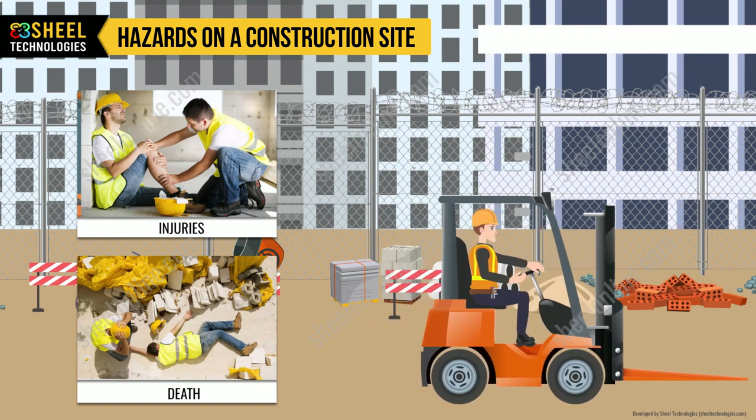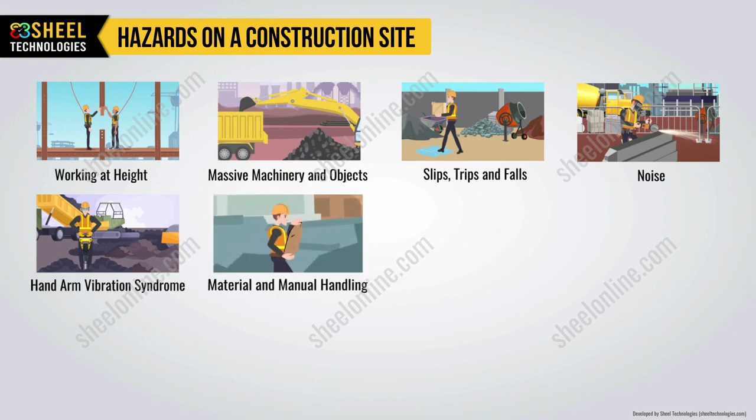Hazards on a construction site. Construction workers engage in many activities that may expose them to serious hazards. These hazards may result in injuries or even death. Every construction worker must be aware of construction site hazards, such as working at height, massive machinery and objects, slips, trips, and falls, noise, hand-arm vibration syndrome, material and manual handling, collapsing trenches, actively used chemicals, electricity, airborne fibers and materials, sharp edges, and scaffold.

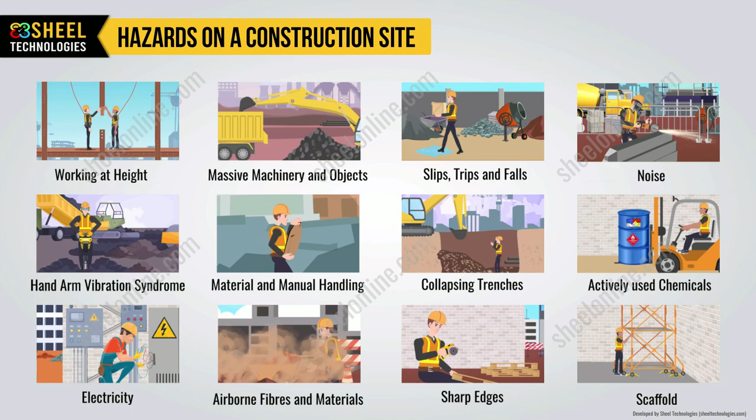Working at height. The construction of buildings and demolition works frequently requires tradesmen to work at height. Fatalities and injuries involving height-related factors account for many accidents each year. The risks associated with working at a height are often increased by added access and mobility restrictions. Training, including safety awareness training, is essential for employees required to work at height.

Massive machinery and objects. While there are a multitude of dangerous hazards at a construction site, dangers posed by massive machinery and objects are one of the most serious hazards. Construction workers must deal with dangerous heavy machinery on a daily basis, including power tools, bulldozers, cranes, forklifts, and dump trucks. Massive machinery and objects incorporated in construction can be a source of danger at construction sites.

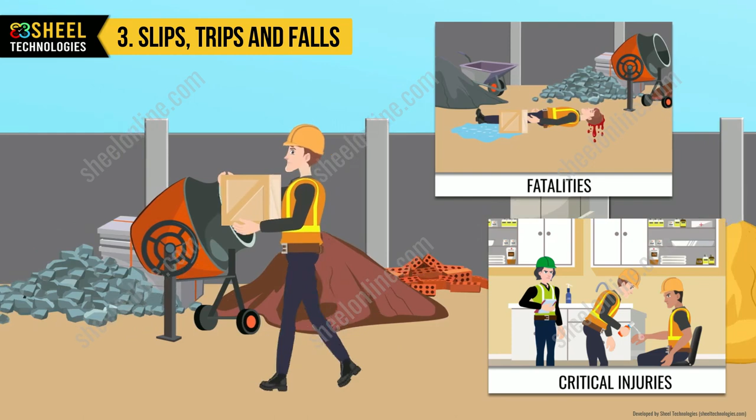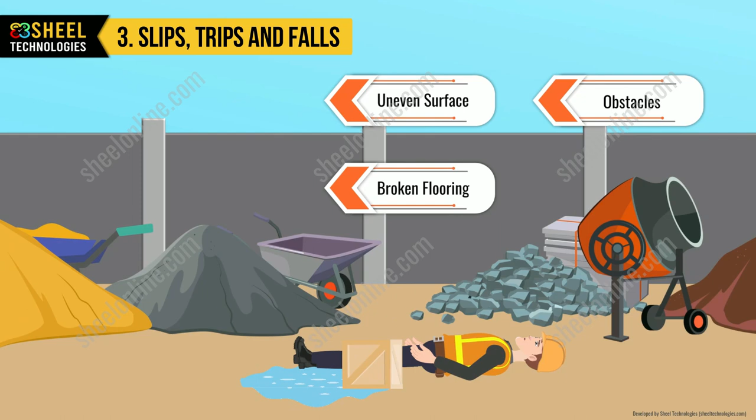Slips, trips, and falls. Falls are one of the leading causes of fatalities and critical injuries. Walking surfaces can be very hazardous if they are slippery. Uneven surface, obstacles, broken flooring, damaged steps, potholes, and other damaged surfaces can result in trips and falls.

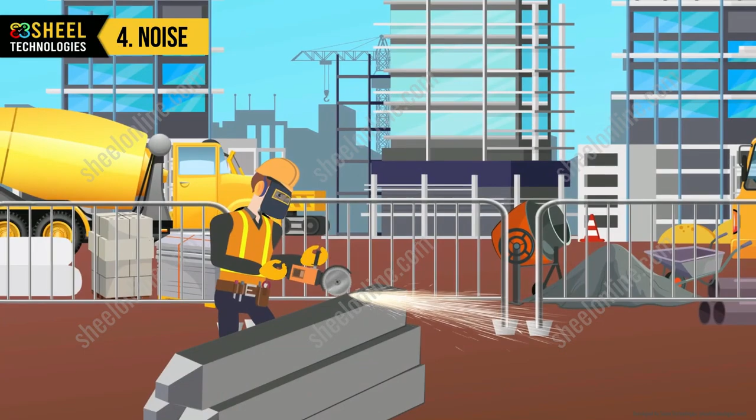Noise. The construction site working environment is busy and noisy. Sudden loud volume can be hazardous for workers, but it's also exposure to long-term, repetitive sounds, such as grinding and drilling, which can lead to short or long-term problems, including hearing loss. Construction site noise can also present a distraction, which can result in accidents.

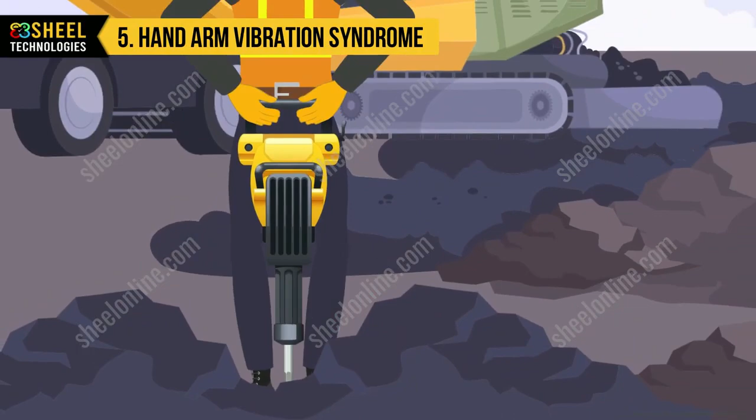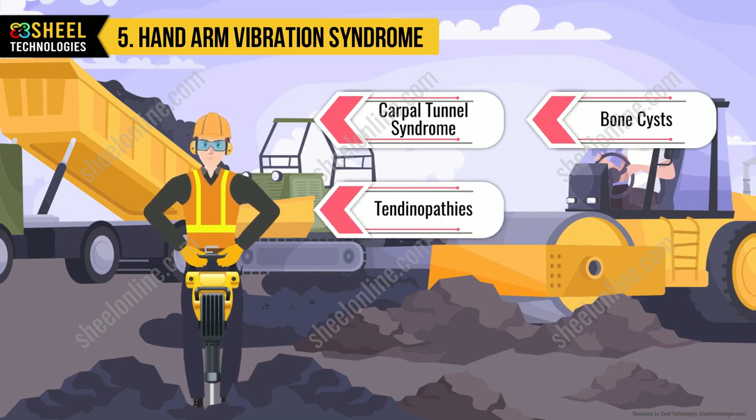Hand-arm vibration syndrome. It is caused by occupational exposure to vibrating hand tools. Conditions such as carpal tunnel syndrome, bone cysts, tendinopathies, and osteoarthritic changes of the hand, wrist, and elbows have been attributed to exposure to hand-arm vibration. It can impact workers for the rest of their lives, and damage and side effects can be permanent in severe cases.

Material and manual handling. Many construction site activities involve manual handling, a hazard which puts workers at risk of musculoskeletal disorders.

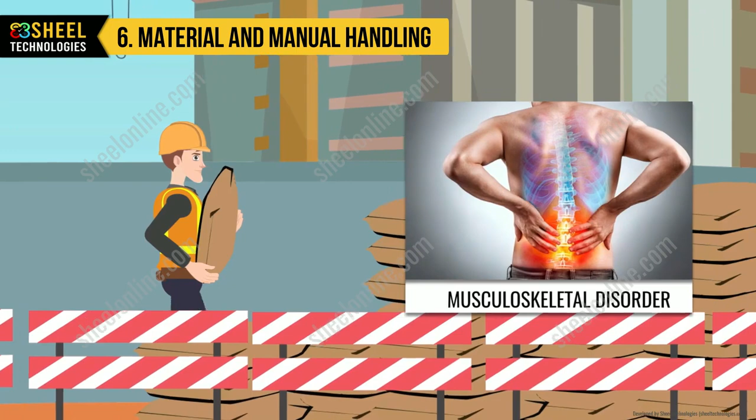Collapsing trenches. A common occurrence on construction sites is the collapsing of trenches with workers inside. Further, a building that is being demolished or under construction can suddenly and unexpectedly collapse, which can injure, or kill, those inside.

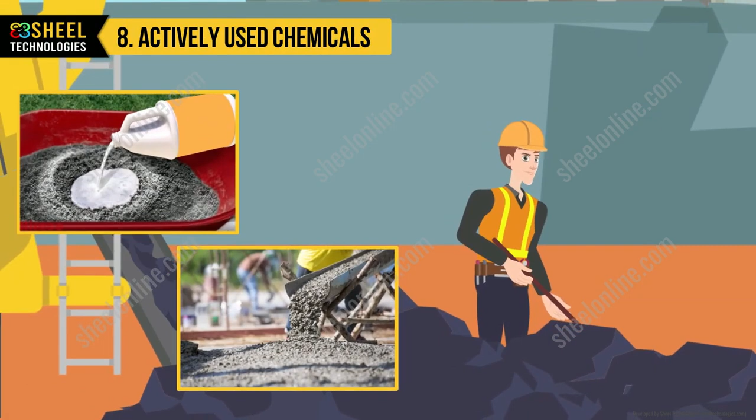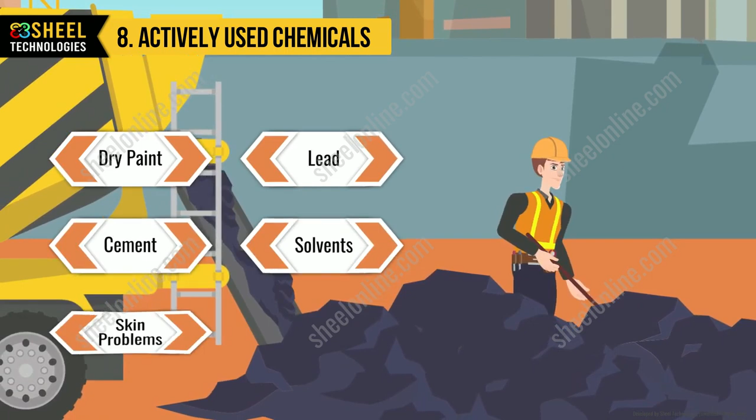Actively used chemicals. Processing equipment that uses chemicals can be sources of numerous hazards. Dry paint that contains lead, and exposure to materials, such as cement and solvents, that can cause skin problems, such as dermatitis. Many other problems can occur by using chemicals, like chemical burns.

Electricity. Electric shock and electric burns occur when a construction worker uses unsafe equipment, such as damaged electrical wires, and exposed wiring, can be dangerous. Electrocution can occur when a person comes into contact with an electric current. Extension cords can be found in almost every work environment. Damaged cords can be dangerous, as they can cause fires and serious injury.

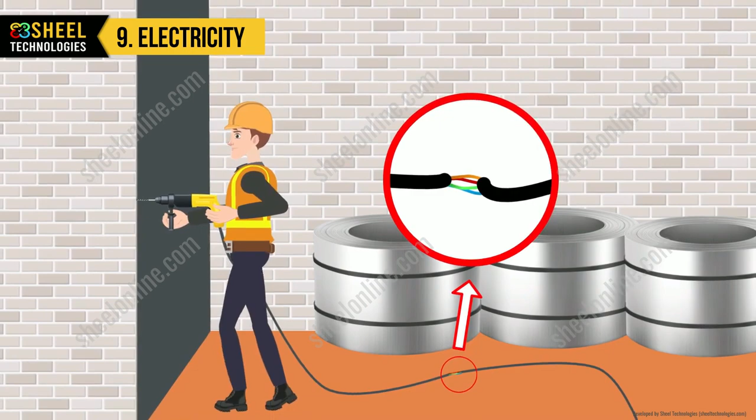Airborne fibers and materials. Unsurprisingly, a lot of dust is produced on construction sites. The dust on construction sites is often an invisible, fine, and toxic mixture of hazardous materials and fibers. This can damage the lungs and lead to diseases such as chronic obstructive pulmonary disease, asthma, and silicosis.

Sharp edges. Simply walking past machinery may be hazardous if sharp edges are not guarded. Sharp edges of machinery and tools or equipment can cause injuries, such as cuts or even amputations.

Scaffold. Scaffold is an elevated, temporary work platform. Workers working on scaffolds are exposed to many hazards, such as falls, slipping, unsafe access, the lack of fall protection, and struck by falling tools and debris. Scaffold collapse can be caused by instability or overloading.

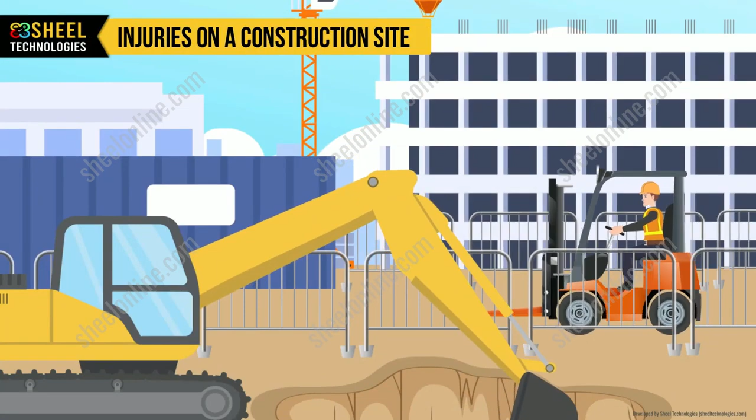Injuries on a construction site. Workers may experience cuts from materials and tools, fatal and non-fatal falls from ladders, scaffolding, and burns from welding and chemicals that are used at construction sites. Some jobs expose workers to harmful materials, fumes, or to dangerous machinery. Workers may also experience muscle fatigue and injuries related to lifting and carrying heavy materials.

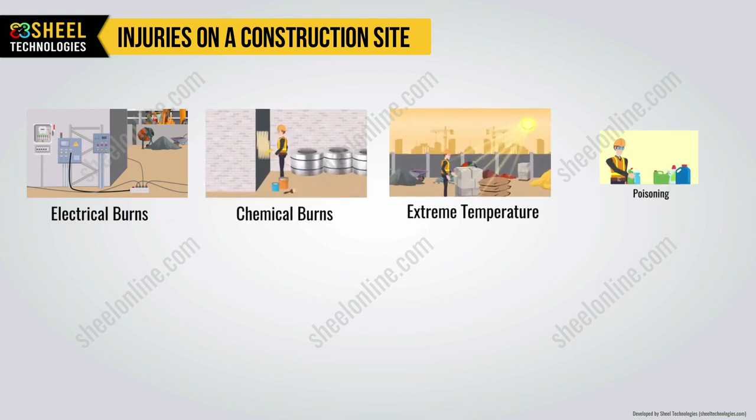While working at construction sites, a construction worker may have to face many injuries such as electrical burns, chemical burns, extreme temperature, poisoning, traumatic brain injuries, repetitive strain injuries, and crush injuries.

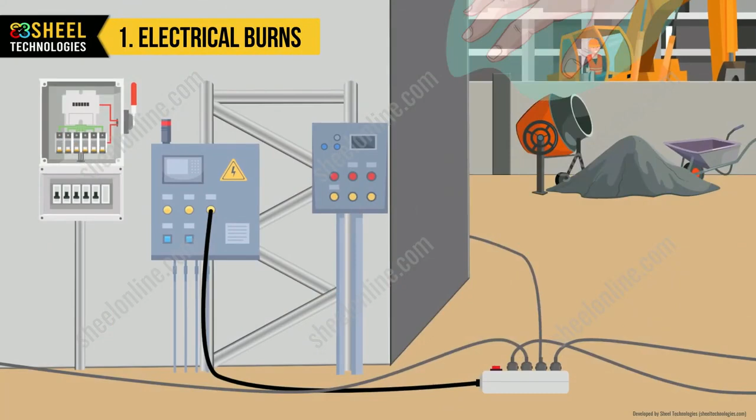Electrical burns. Although not safe, it's not uncommon to find loose wires around a construction site. An electrical burn can occur when a current jumps from an electrical outlet, electrical cord, or electrical appliance, and passes through your body. These types of burns can cause internal damage to the body, including brain injury, heart injury, or death.

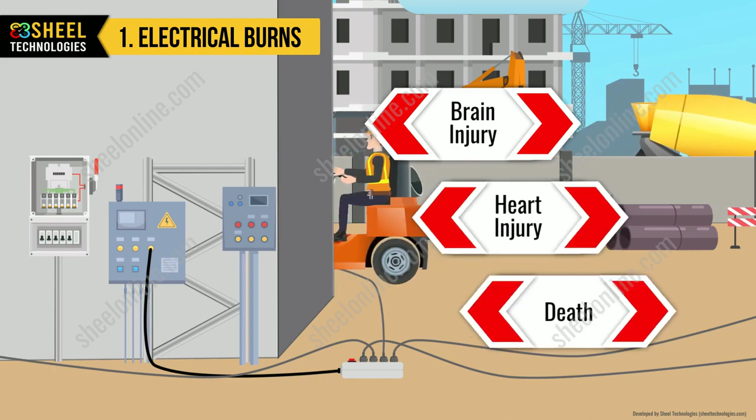Chemical burns. Chemicals are sometimes required on construction sites, like paint thinner, plumbing products, or bleach. In the case that a chemical is not appropriately sealed, stored, or out of the way of typical construction work, an injury to the body may occur, like a spill. A chemical burn occurs when the skin is in contact with a strong substance, burning through the skin until it's adequately washed away.

Extreme temperature. Work outdoors increases the possibility of suffering from heat exposure. Extreme temperature can also pose a danger to workers. Heat stress can cause heat stroke, exhaustion, cramps, and rashes.

Poisoning. Poison from hazardous chemicals can cause severe damage or death. Traumatic brain injuries caused by not wearing a safety helmet at construction site.

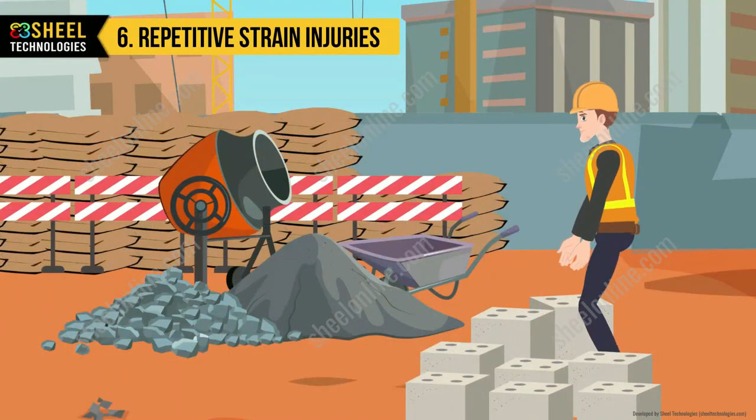Repetitive strain injuries. Lifting heavy loads or carrying heavy loads, frequent bending or frequent twisting, and heavy physical work are risk factors for low back disorders. Repetitive strain injuries are associated with repetitive tasks, forceful exertions, vibrations, mechanical compression, or sustained and awkward positions.

Crush injuries. Slips, trips, and falls are a major source of injuries and fatalities among construction workers.

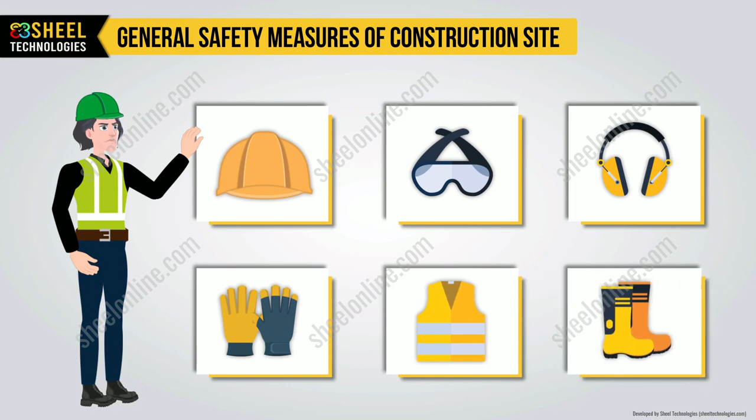General safety measures of construction site. The first rule of safety is always wear correct protective equipment. Do not drink or take drugs while working. Always pay attention to personal hygiene.

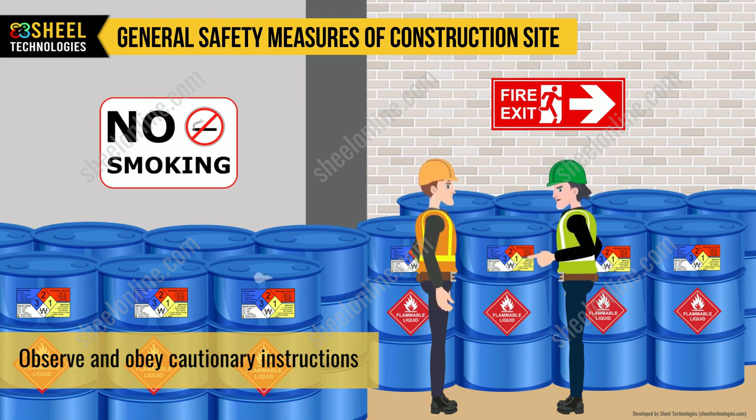Do not play in the workplace. Report to your supervisor immediately if you notice any unsafe condition. Observe and obey cautionary instructions, signs, and symbols, which are displayed in the relevant places.

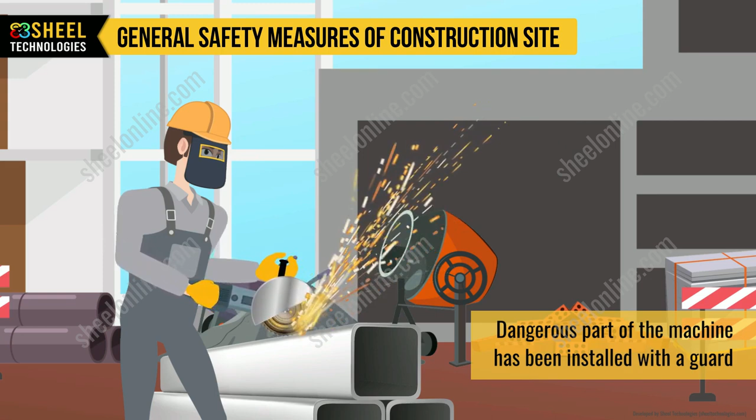Before you operate a machine, ensure that the dangerous part of the machine has been installed with a guard. Avoid going to any area with insufficient lighting, as there may be some dangerous places which have not been provided with fencing.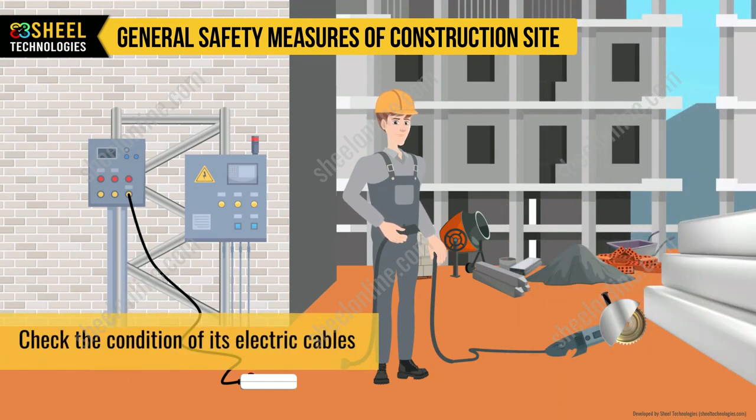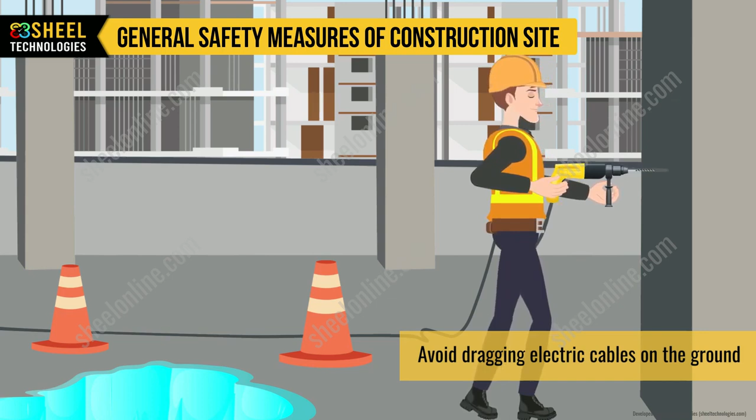Keep vigilant all the time, and watch out for moving cranes, hooks, or other lifting equipment. Before you use any electrical installation or tool, check the condition of its electric cables. Avoid dragging electric cables on the ground or allowing the cables to come into contact with water. Use electrical tools installed with an earth leakage circuit breaker, ELCB.

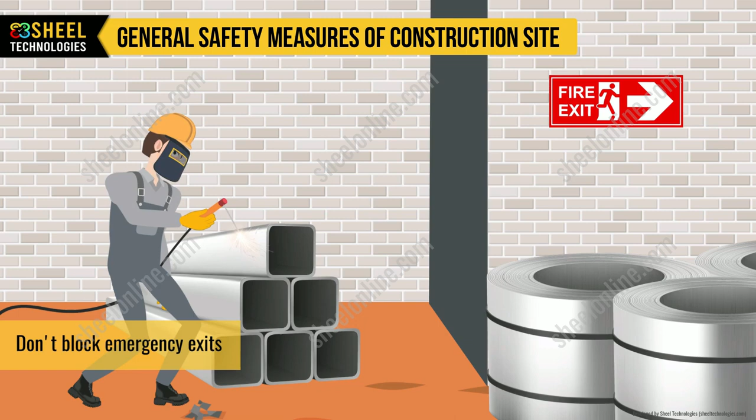Use and handle chemicals with care. Don't block emergency exits and assembly areas. Avoid shortcut methods and do the job with safe procedures.

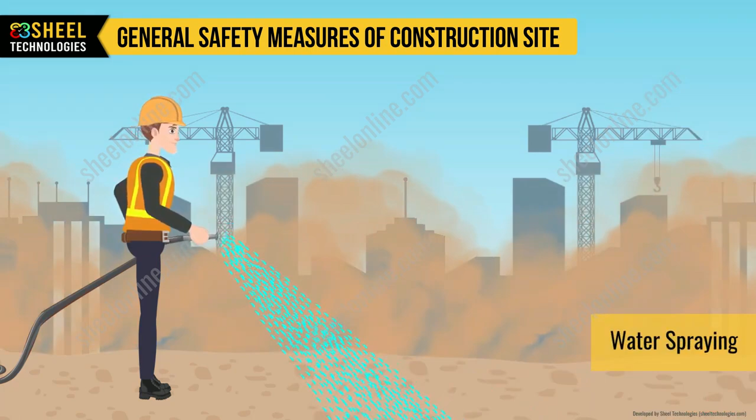People should wear dust masks and safety glasses in all dust-polluted atmospheres. Suitable measures, like water spraying, shall be done frequently to reduce the effects of dust pollution. Adequate training shall be provided among the employees in increasing the awareness on environmental protection procedures.

Construction accidents. Two construction workers die each day at construction sites, on average, and thousands more are seriously injured. But the loss doesn't stop here. Construction accident injuries cripple entire families' abilities to earn income, care for their dependents, and sustain their quality of life.

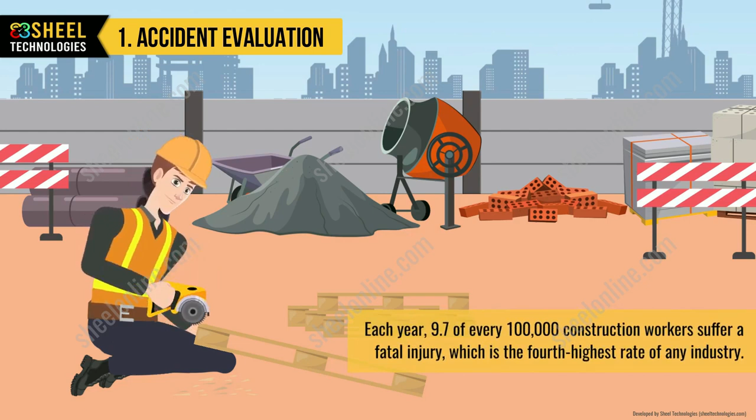Accident evaluation. Each year, 9.7 of every 100,000 construction workers suffer a fatal injury, which is the 4th highest rate of any industry. Workers between 25 to 34 years old are the most likely to be injured in a construction site accident. Most construction site injuries involve construction workers' back and spine.

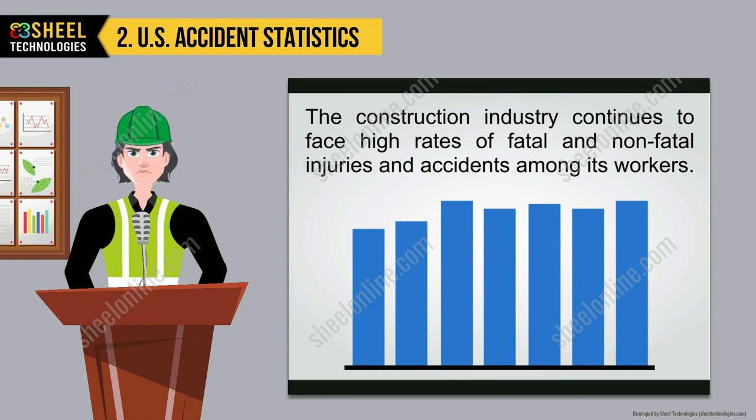U.S. accident statistics. The construction industry continues to face high rates of fatal and non-fatal injuries and accidents among its workers. Fatal construction industry statistics: 1 in 5 deaths among U.S. workers is in the construction industry.

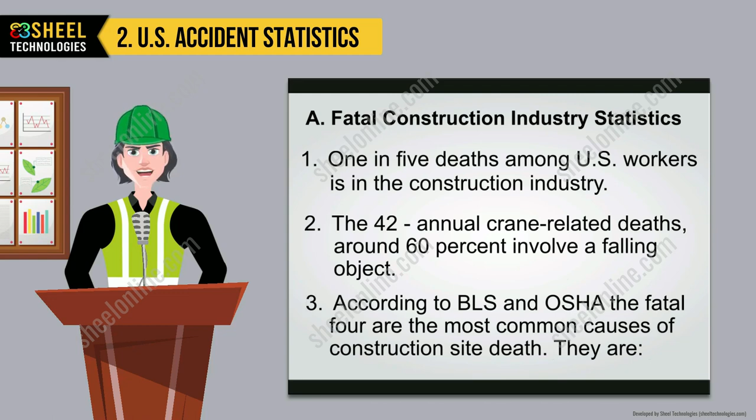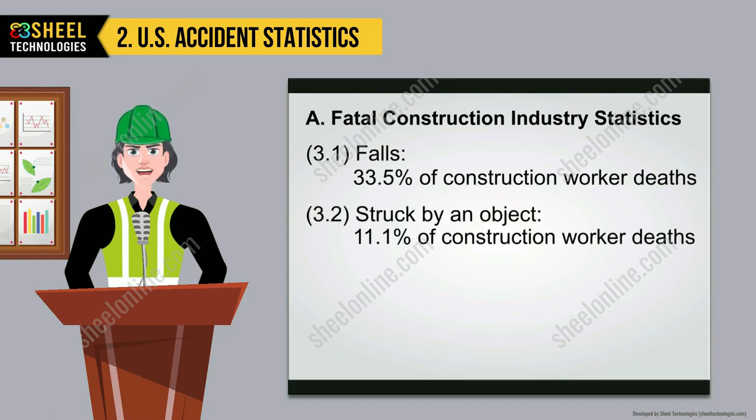The 42 annual crane-related deaths, around 60%, involve a falling object. According to BLS and OSHA, the fatal four are the most common causes of construction site death. They are: falls, 33.5% of construction worker deaths; struck by an object, 11.1% of construction worker deaths; electrocutions, 8.5% of construction worker deaths; caught in between, 5.5% of construction worker deaths.

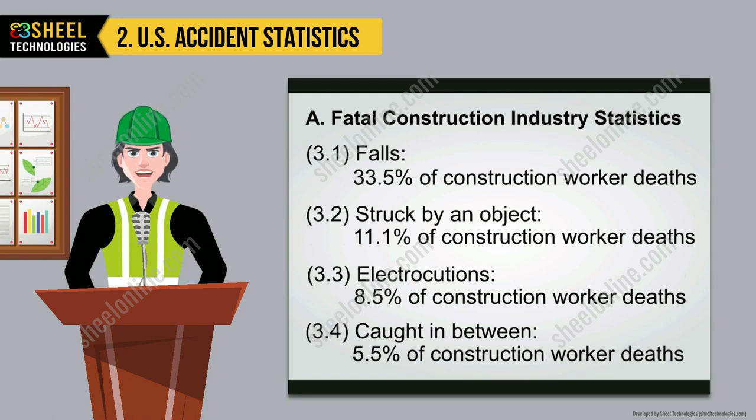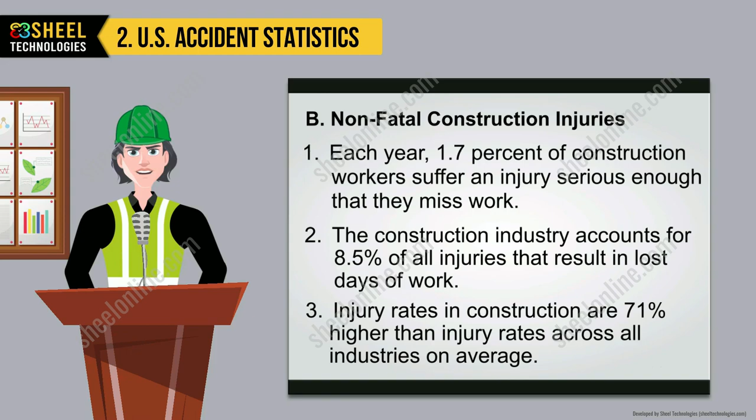Non-fatal construction injuries. Each year, 1.7% of construction workers suffer an injury serious enough that they miss work. The construction industry accounts for 8.5% of all injuries that result in lost days of work. Injury rates in construction are 71% higher than injury rates across all industries on average.

What to do when an accident happens? Get medical attention. Document or report the injury to your employer or construction site manager. Gather contact info for witnesses. Seek an attorney to evaluate potential claim.

Preserve evidence. Take photos of the injury, location where the accident occurred, and if possible, retain objects related to the injury.